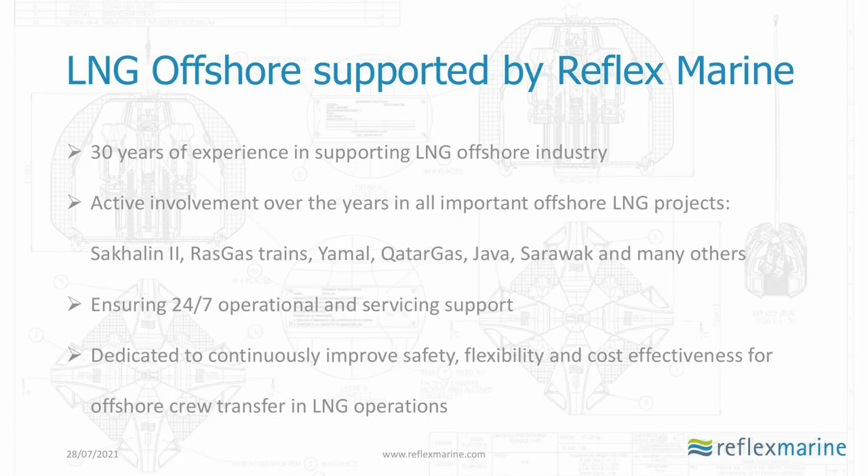Of course, during this process, we do have the need to transfer crew for whatever reason. In those circumstances, companies would, and in this case Shell, would mostly use our crew transfer equipment because it offers them extreme flexibility. It is very easy to use. It requires very little or no training, and it is extremely flexible in a sense that it can fit almost any type of vessel.

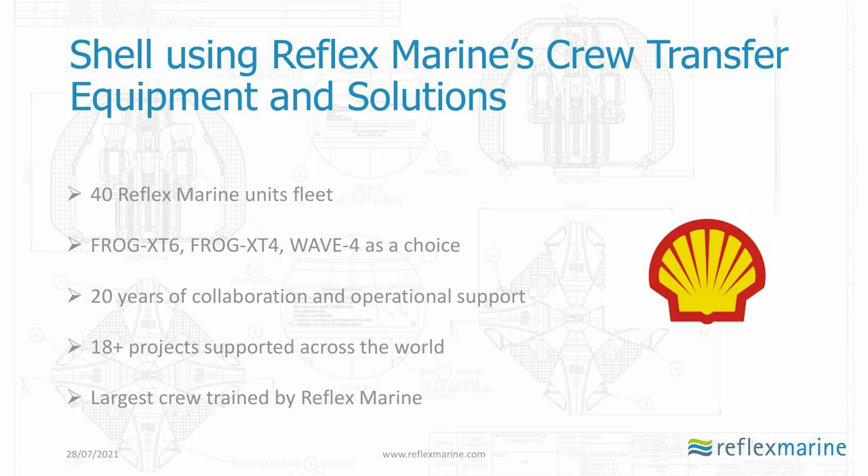We trained over 80 crew members of Shell in Southeast Asia. This training took place a couple of years ago, and it was operational best practice training. Victoria will share with you the link to more information on training that we provide for our clients and partners. I won't go into much detail now because she will provide the link where you can find all the information after the webinar. So moving on, what does the LNG industry and what do LNG companies need?

They need safety, simplicity, flexibility, timeliness. They need support, and finally, but not least important, they need cost effectiveness.

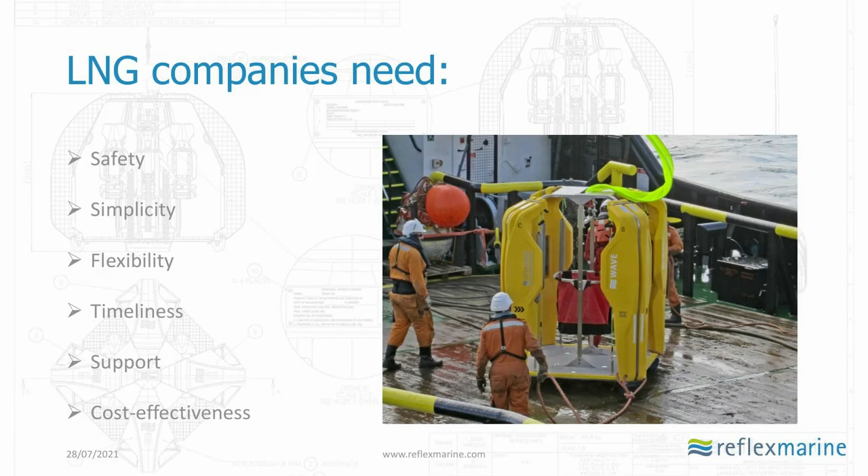And how are we supporting them? We support them through safety. We offer the safest crew transfer option. We have currently over 10 years without a lost time incident.

Simplicity: we offer ease of use and ownership. All units that we provide are very easy to use. They don't require any particular commissioning. They're very easy to maintain as well, and the lifespan for each unit is quite long, so it can go over 10 years. So it's very convenient in that sense.

Timeliness - the unit can be deployed in minutes. It comes fully assembled, stored fully assembled, and doesn't need any particular pre-assembly before it's used. The crew transfer process itself takes minutes, so it's an extremely convenient way of transferring people for scheduled transfers, but also when transfers need to be performed out of schedule.

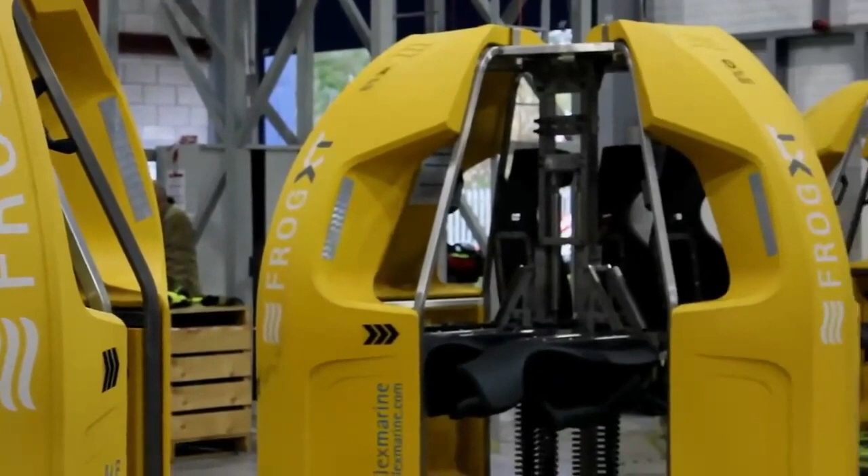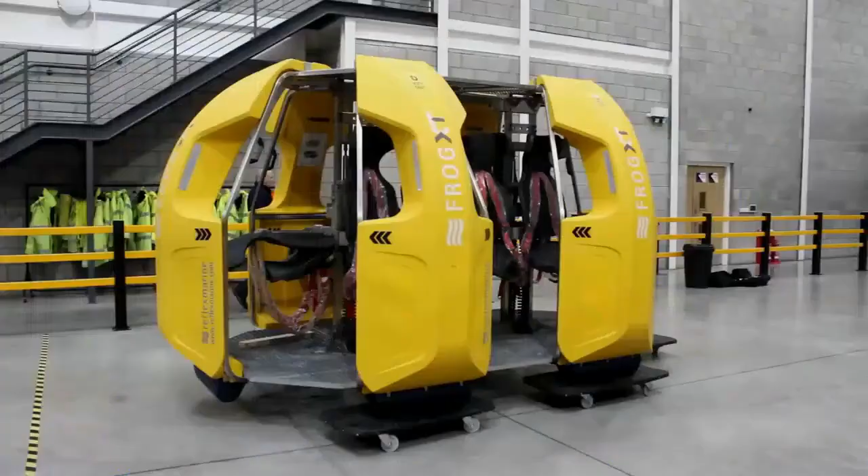Frogs in general have been taken out all over the world, so anywhere where there's oil and gas activity, frogs have been bought and sold. For example, the west coast of Africa, they're very popular. The Middle East, Southeast Asia is very popular for frogs. Even in the North Sea, there's frogs on most platforms.

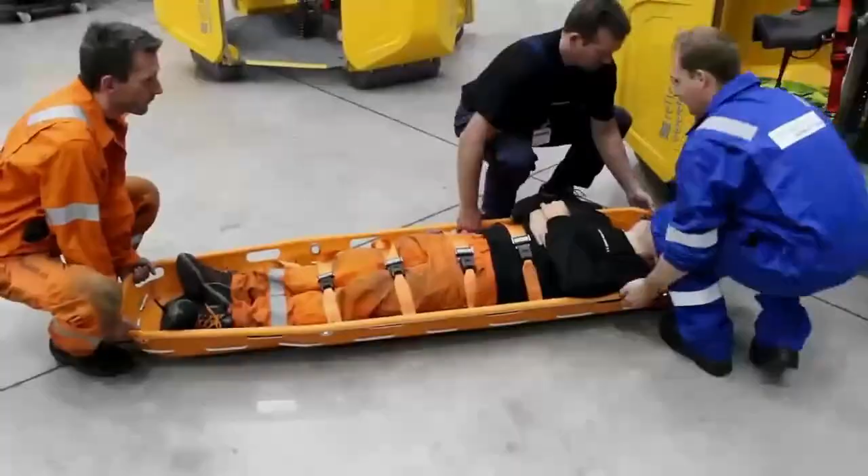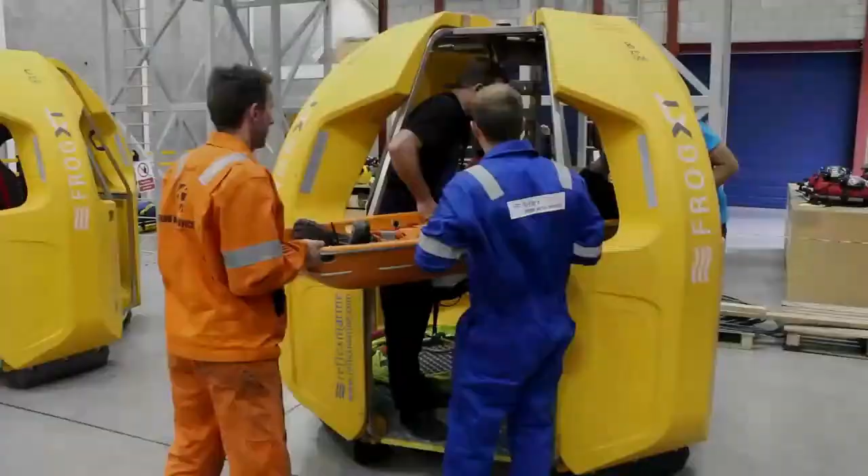With the frogs having medevac capabilities and increasing awareness around having a backup way of transferring crew if there was high fog or a helicopter grounding, more and more operators are seeing the need for having something like this in place.

There's a whole load of improvements like design and engineering changes that we've made from our previous range. It's got a wider, higher operational capability, so it can operate in higher sea states. It's standardised parts throughout the whole range, so it's easier to inspect and maintain. We've also reduced the footprint, so it takes up less space on the rig. You can fit it inside a standard sea container now, making it easier to transport and store.

The aim is to continue developing the product, so any small problems we have or any future improvements we'll try to bring to the range, so that it helps bring new benefits to our customers, just to make the whole process of crew transfer easier and safer. That's the main reason for developing the frogs and continuing to improve them - to improve general safety levels in the industry.

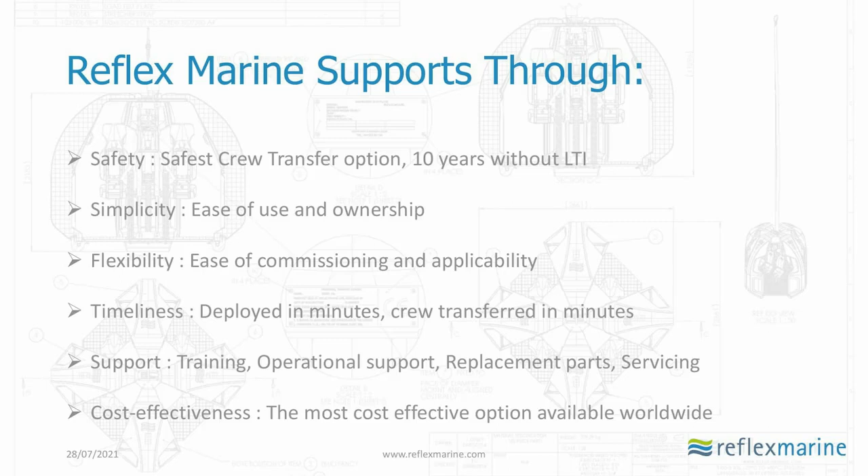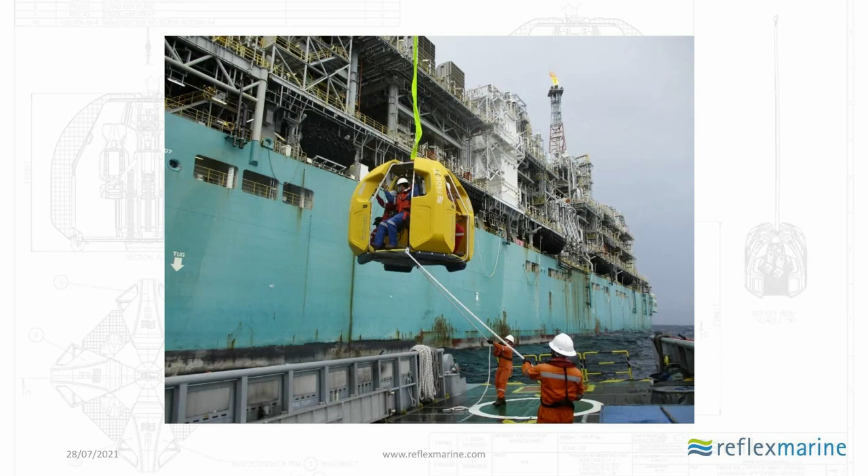But for the purpose of this presentation and webinar, I chose just the FLNG to show. So here we have the same FLNG installation with crew transfer taking place. This is an offshore supply vessel, and the Frog is being landed on it. You can see the size of the unit in comparison to the deck of the supply vessel, and also in comparison to the FLNG vessel itself.

Petronas chooses Frog XT6. Frog XT6 is identical in footprint and outer shell to the Frog XT4 that you saw at the beginning of the webinar. The only difference is the configuration of seats, which are arranged differently to fit 2 more passengers.

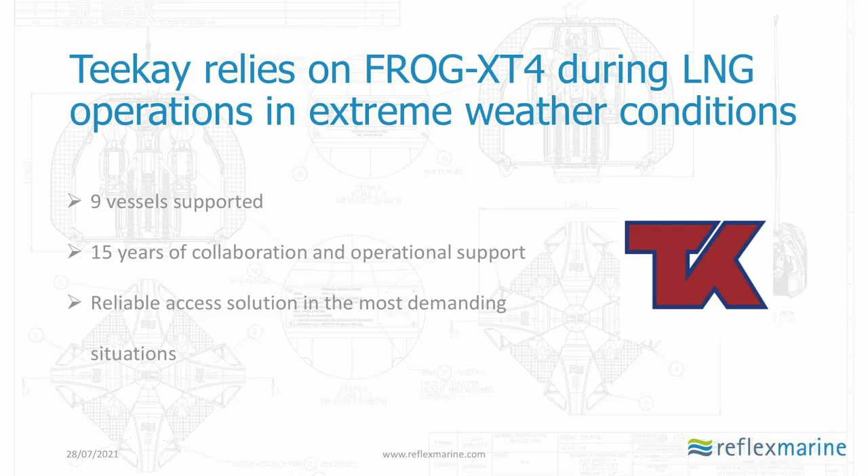We are also working with MOL, as I mentioned. MOL also uses Frog XT6, and they use Wave as well. Recently, they have bought quite a large fleet, so MOL currently has the largest Wave 4 fleet in the world from all LNG companies, and they use it in all their operations across the world.

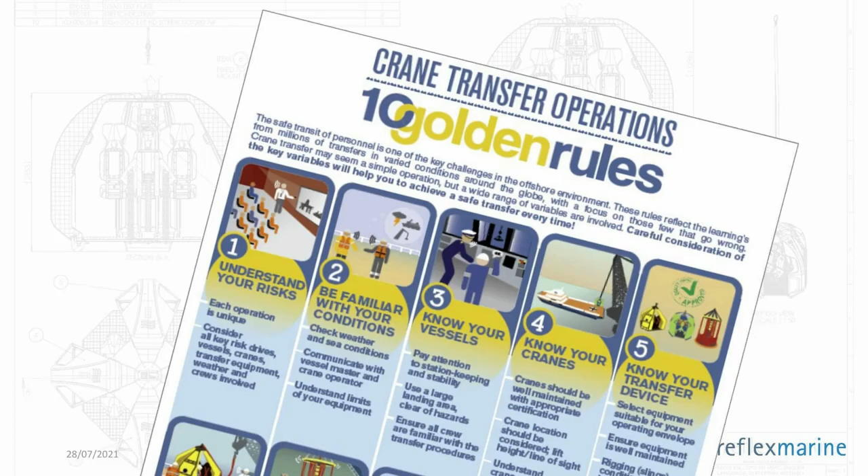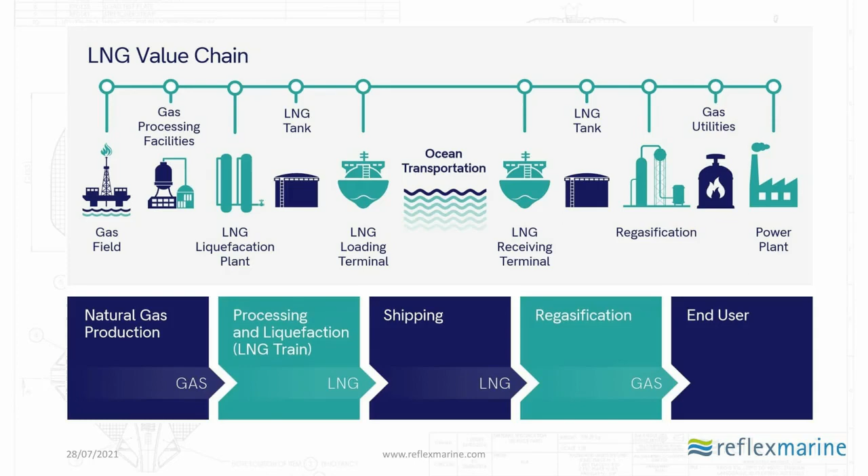But bunkering is becoming, from being quite low key and not very specialized activity 30 years ago, with the development of LNG, quite an important piece of the puzzle and requires a lot of skill. It can be an extremely dangerous process if it's not done correctly, and requires extreme focus on safety, which again is where we come in, particularly when it comes to safe crew transfer during bunkering operations, regardless of whether that operation is in port or done out on the sea.

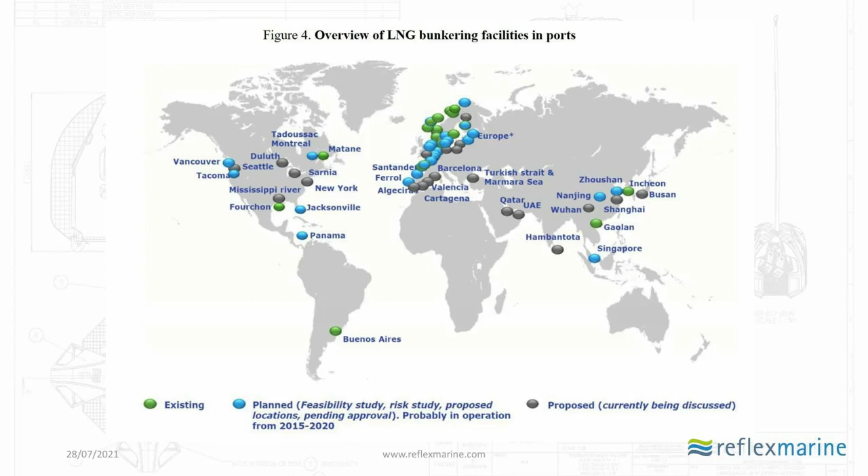It can easily be converted to a medevac mode. On the video that Victoria showed us, you were able to see the conversion of one of the Frog XT units to medevac mode, and you could see how easy it is to install a stretcher with the casualty.

For Wave, it's a similar process. You would slide the stretcher across the luggage basket and lock the stretcher in place, and that would be secured. In case of a scenario where the unit would end up in water with the casualty inside, the water level would be underneath the stretcher, so the injured person would be completely protected until they can be taken to safety. I have mentioned that we had a situation where one of the clients asked us to modify this type of unit for them, and we were able to do that.

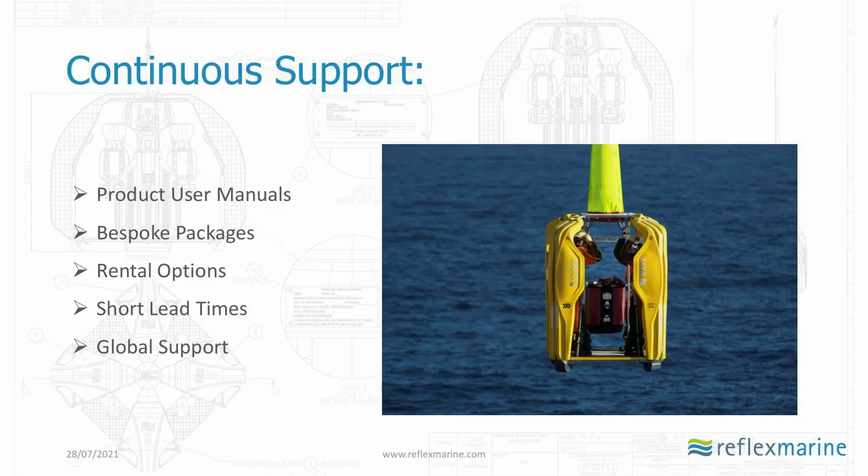They use it in Europe, in South Asia, like Bangladesh. They are using Wave on a project in Bangladesh and in other parts of the world. So, again, one of the companies that prefers Wave to any other option.